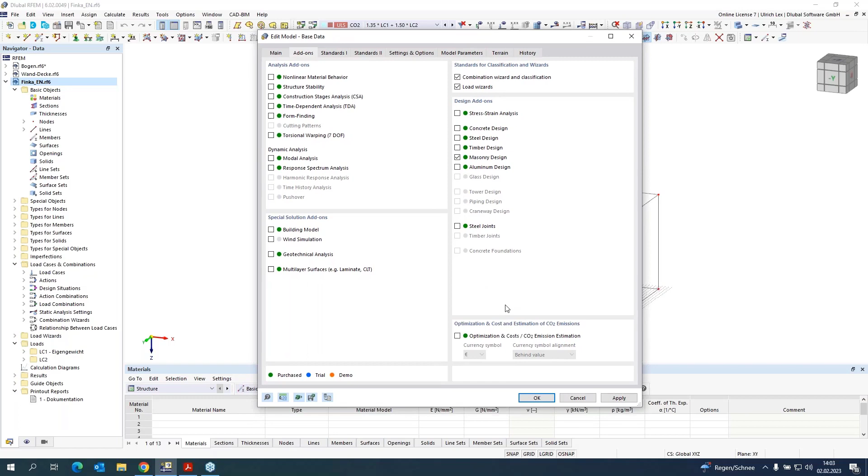I have prepared a structure with lines and nodes so that it is easier to continue. You can import such a structure also via DXF, or if it's possible with Revit, if you get this file. So at the beginning, when you work with the masonry add-on, please check in the base data if the module is checked on. This is necessary so that the material model is available in the program. If it is checked on, you can continue with OK.

So for the first step, I want to create some new materials. I can do it here with new material. At first, I can choose the material type masonry, and here the material model that I want. Basically, we have two different material models for masonry. The isotropic one, some of you know it maybe from RFEM 5, and the orthotropic masonry, where you consider the stiffness in both directions and the shear stiffness of masonry exactly. So this orthotropic one is the best one.

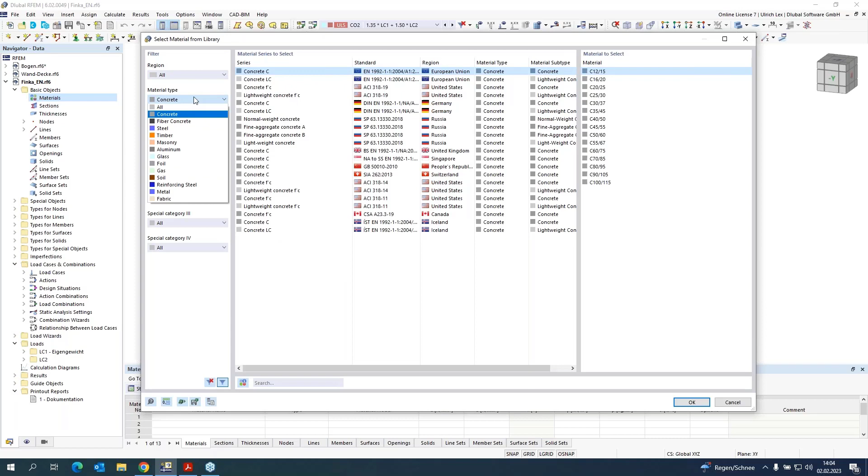Now you can choose a material from the library. I want to create a new material for the outer wall, maybe in Porotherm. In the database there are still only products from Austria, but we are continuing to implement new materials as far as we can. If you read in the materials, you can see in the standard classification the table is filled out. You can do this also with data sheets from a manufacturer. You get all values, I think, from the manufacturer.

One value maybe not. It's the horizontal compressive strength. Maybe you can ask the manufacturer, or you can use some default values. This value is depending on the group, and here you can say for the group 1 you can use 60% of the compressive strength, for the group 1S 80%, for the group 2 10%, for the group 3 5%, and for the masonry group 4 100% of the compressive strength fb. Set the default values if you have nothing better from the manufacturer.

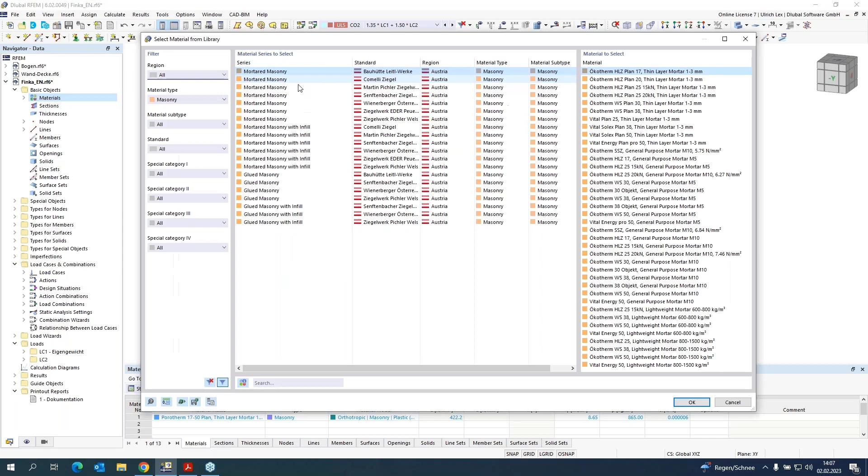Okay, then I will continue and create the next material for the inner wall. It's the same as before. Okay, I have to do it again to create a new one. And the third one, I want to create a patio and use a full stone maybe. And as the last material, I want to create a concrete for the slabs. Very important, you always have to set the orthotropic material model.

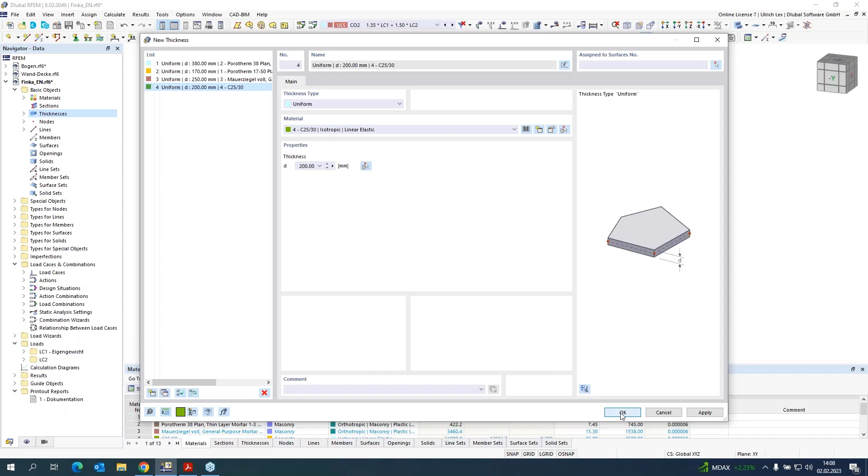Okay, the next step I want to do is to create the thickness. The first thickness will be the outer wall with 380 millimeters. The second one with 170 millimeters. The third one 250 millimeters. And as the last, the concrete one with 200 millimeters. So now I have defined the material and its thickness.

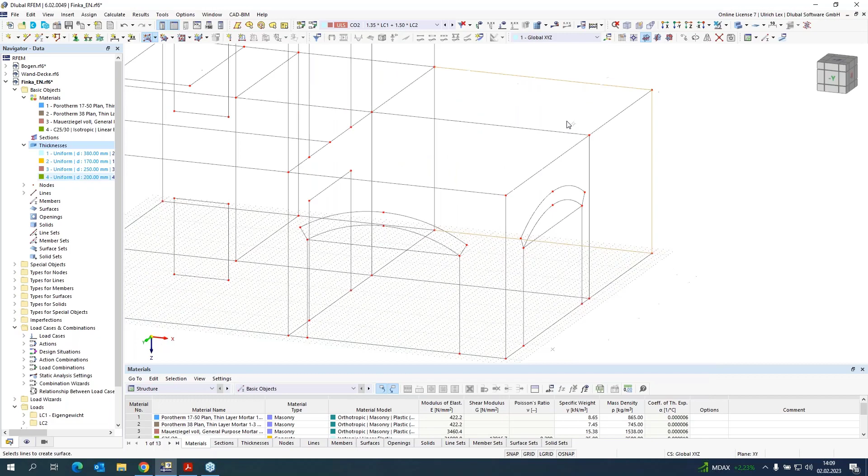Then I can start to create the surfaces. As I already have the nodes and lines, I can do it with select boundary. I can choose my thickness for the outer wall and choose my lines to create the wall. I will do it for all walls.

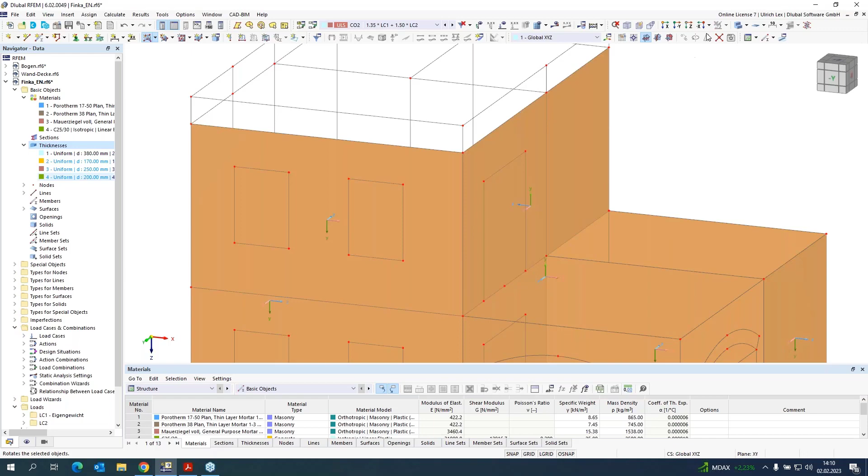This one. And upstairs I have also 4 walls. And the last one.

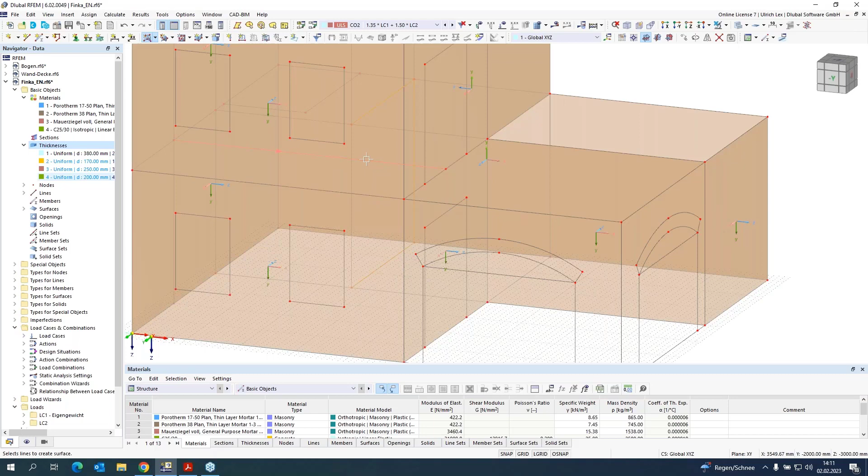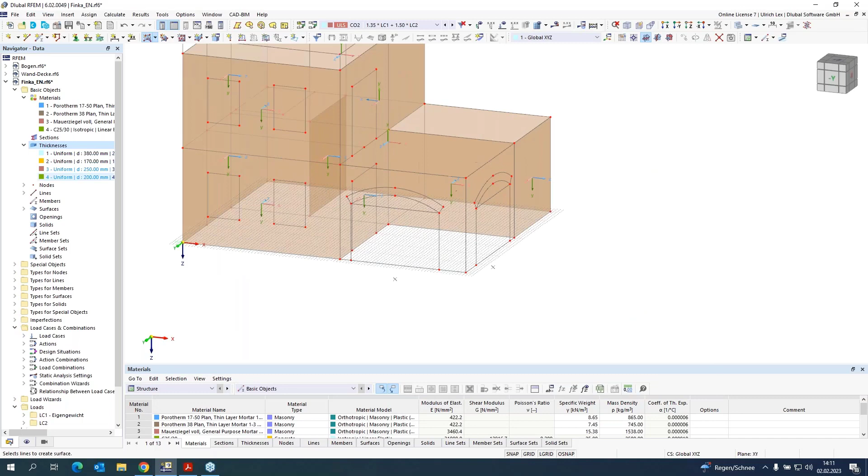Okay, as next step, I want to create the inner wall. Choose my thickness. The material is automatically attached to the thickness. I only have one wall inside the building. As the third one, I want then add, okay. I have here to choose this line.

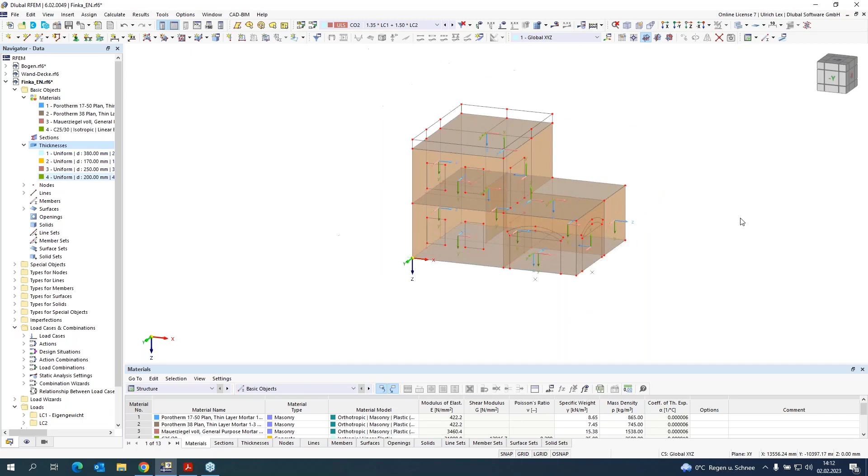And as the last step, I want to create the concrete slabs. One for the roof slab. And the base plate. So, okay, that was the final thing.

On the roof, or for the roof slab, we have the first thing we have to consider if we work with masonry walls. If you have a masonry wall and a roof slab, then always the slab wants to turn up in the edges. That would cause damage here in the masonry. That's why we have to create something so that the slab cannot turn up.

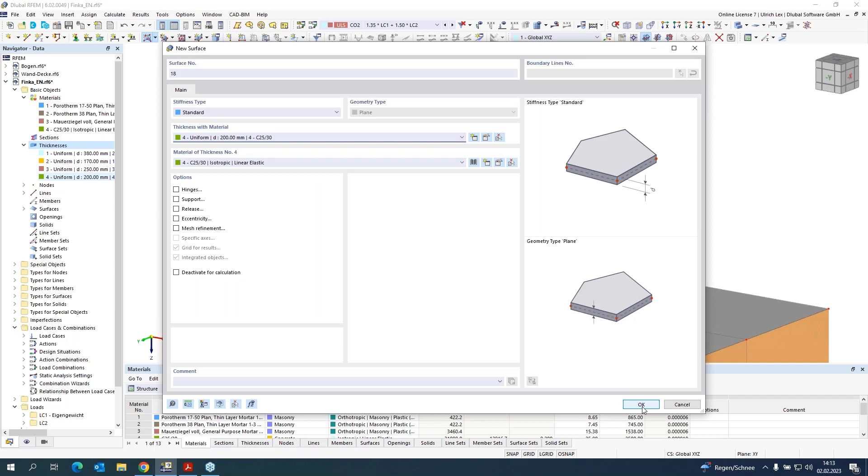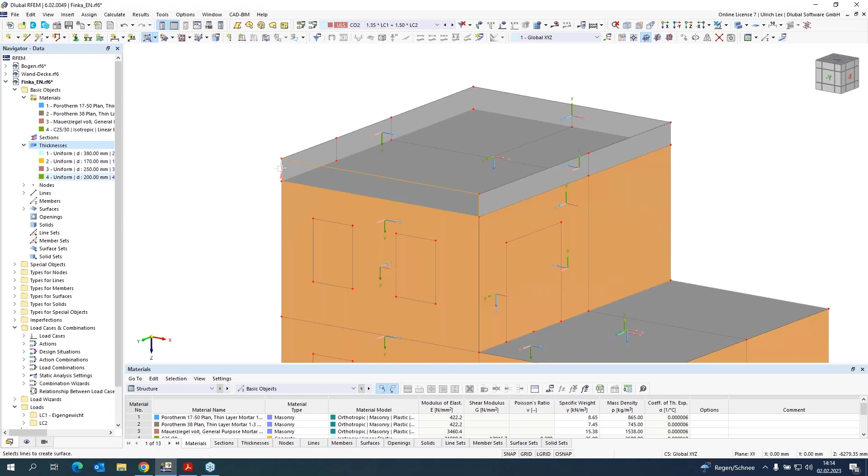In this case, I want to create an attica in concrete, so that this turn up cannot happen. That's why I create here some additional surfaces in concrete. That's the attica. Oh, that's the wrong line. Okay.

Here on the patio, we do not want such an attica. That's why we have to think about another possibility to avoid this turn up. Here I decided to create a new member that connects the slab in the first floor with the base plate, and to, I would say, hold the slab so that it cannot be turned up.

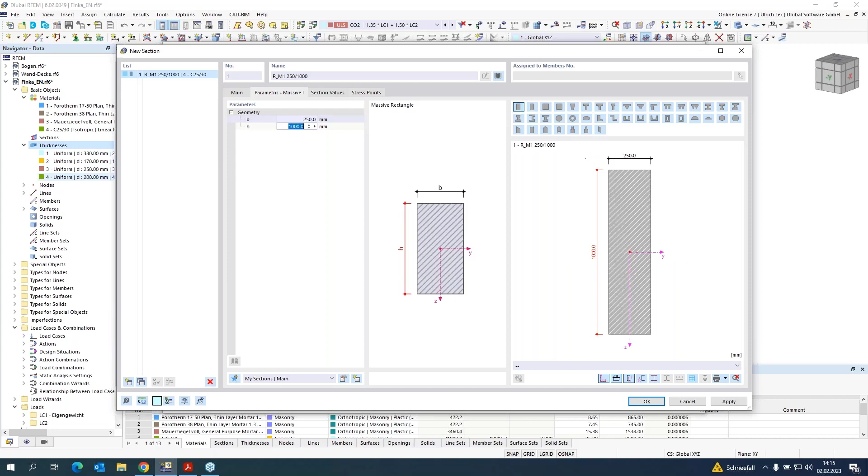So here I can select it, double click and assign a new member, like a member type beam, create a new section, material concrete, dimensions maybe 250 by 1000 millimeters. Okay. Now we have modeled the whole structure of the building.

What do we have to think about now? An important thing is also the local axis of the surfaces. Masonry does have a different stiffness in Y and X direction. That means the Y direction should always be in the direction where it is loaded, and the X direction is the other direction. The Z direction is important in our program to evaluate the results.

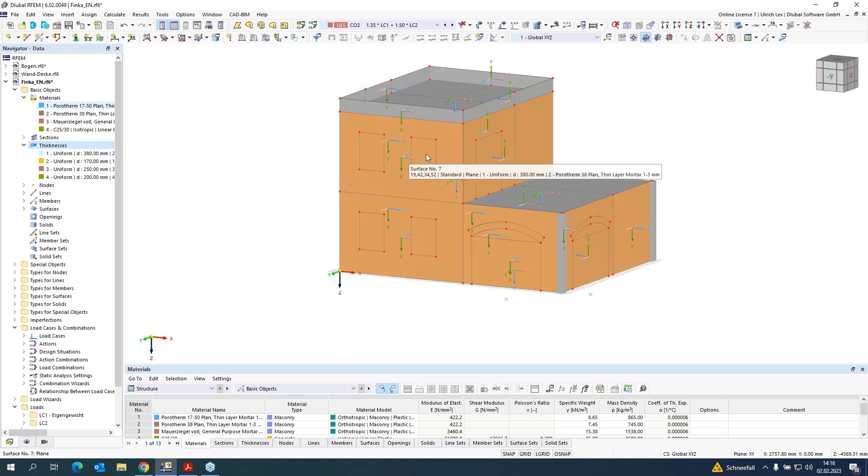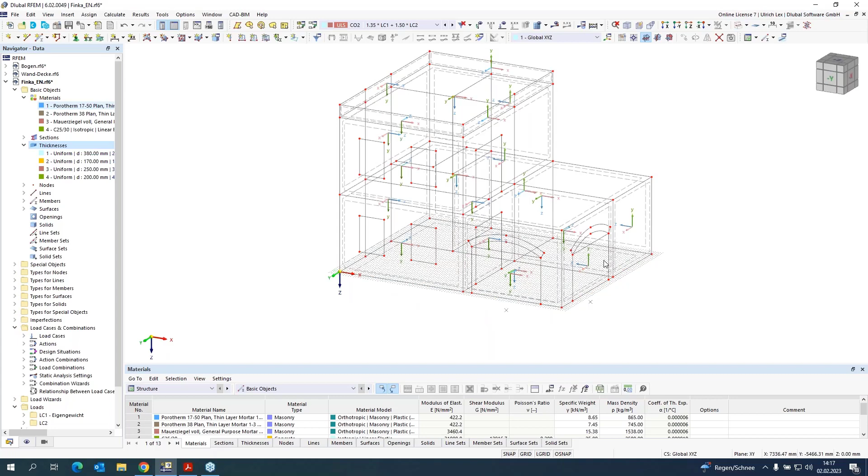And I'm used to orientate the local Z-axis in the same direction. I always try that all local Z-axes point inside the building. That's why I changed it for this surface. Here it's okay, here it's okay. So, and maybe this is inside, this we have to change. Okay, so far so good.

The next step we can do is create the openings. The lines are still there. That's why we can use them. We can define it graphically. Here, here, and here. And here is the door. Inside is a door. Here we want to create such an arch.

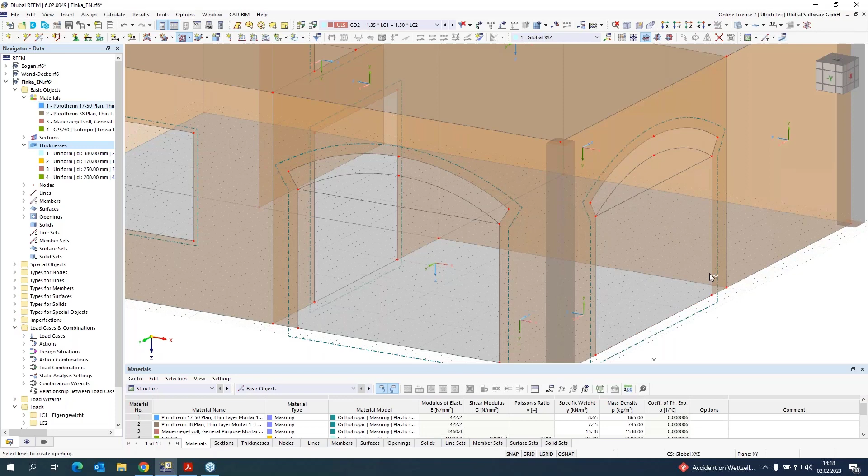Okay. If we create openings in a masonry surface, we have to think about the lintel, because the masonry does not have a stiffness for tension. So it could be that this area falls out of the wall. In practice, there will be some masonry lintel or something else. But this is the reason why we have to create it in the program too.

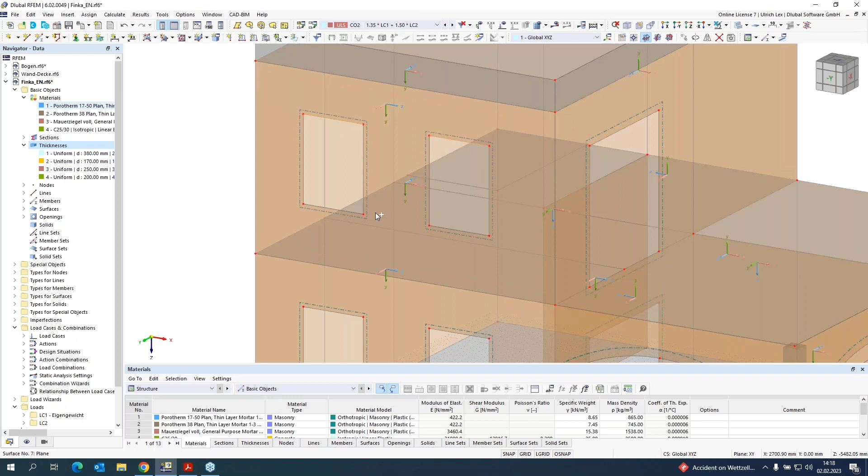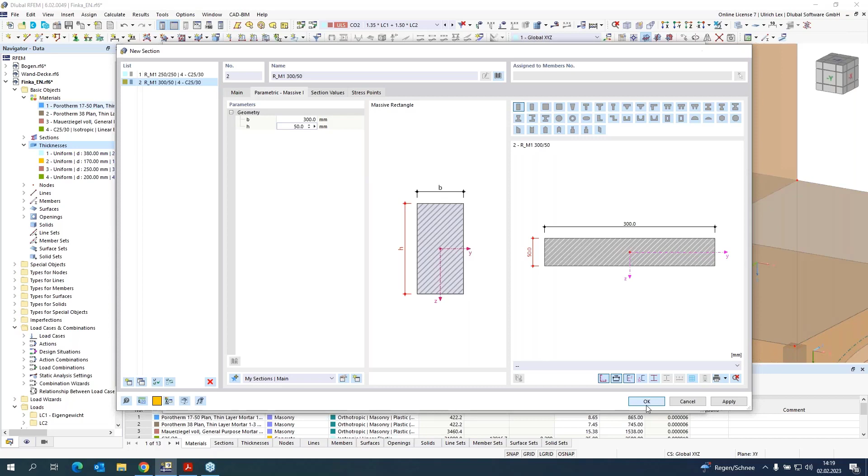Therefore, I want to create a new member, or assign a new member, create a new section, concrete, maybe with a width of 300 and maybe 50 millimeters high. Okay.

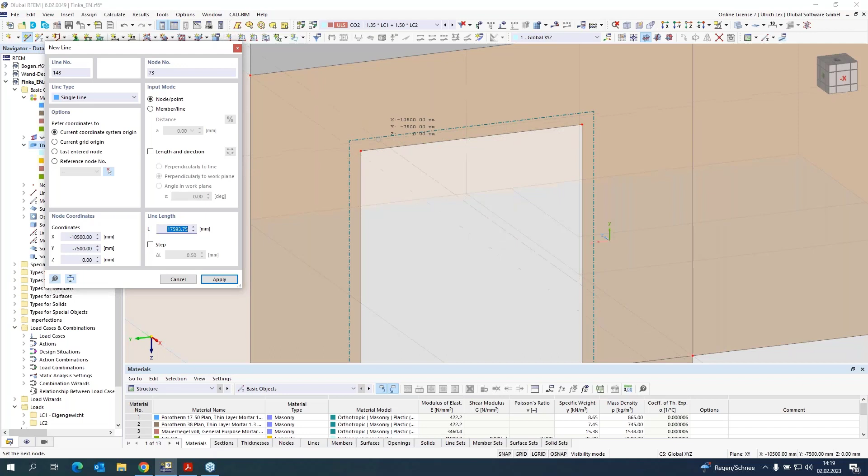If there are bigger openings, then it is the same. You have to create a lintel too, but we have to extend the line a little bit into the masonry wall. That's why I extend this line 10 centimeters or 100 millimeters into the masonry wall. The reason for this is that I can smooth the loads, so that not one FE node gets the whole load from this lintel.

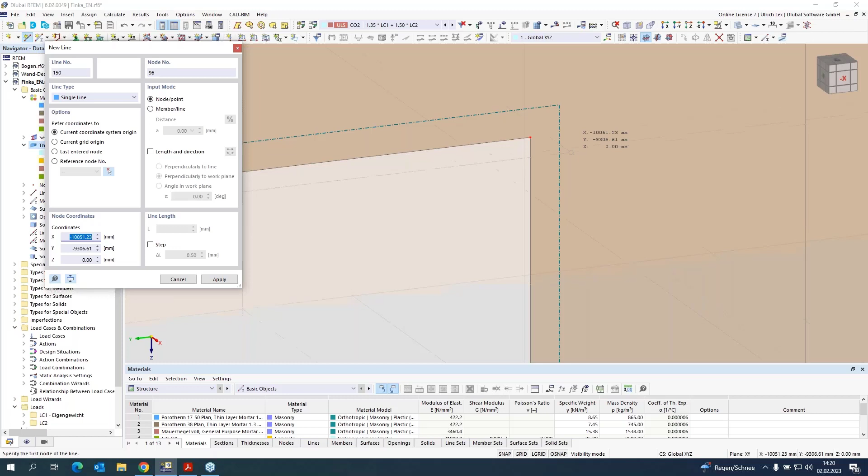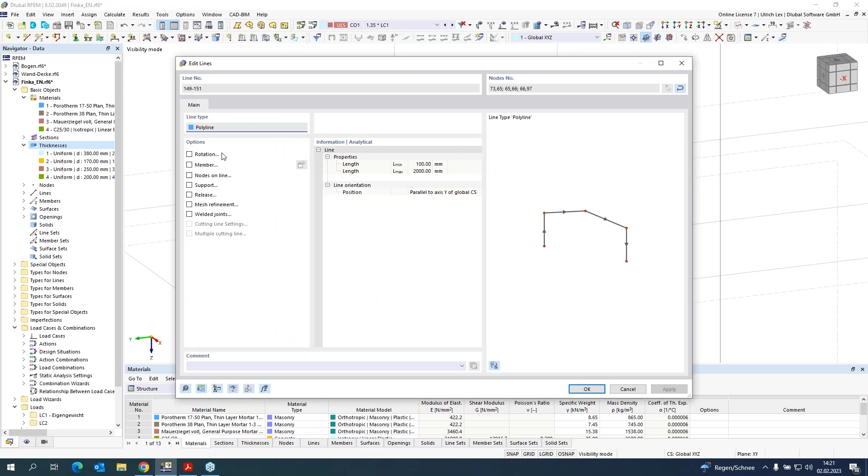To copy it. And I want to copy it also for the second opening. And here I can assign this member too.

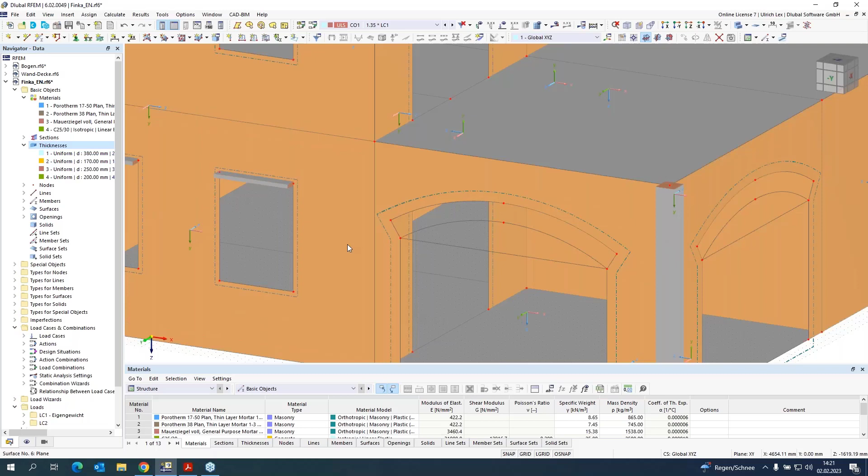So as a next step, I want to take a look at this arch. Here I do not want to assign any concrete lintel. I will assign a new surface with material, with masonry material. And the second one too.

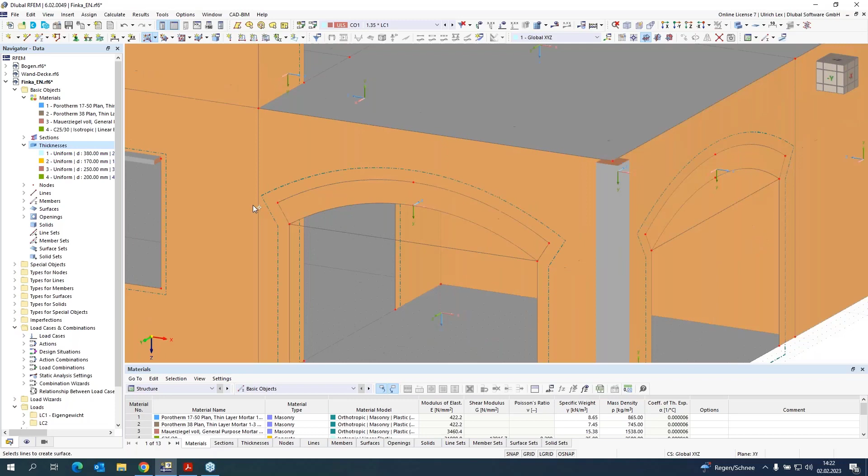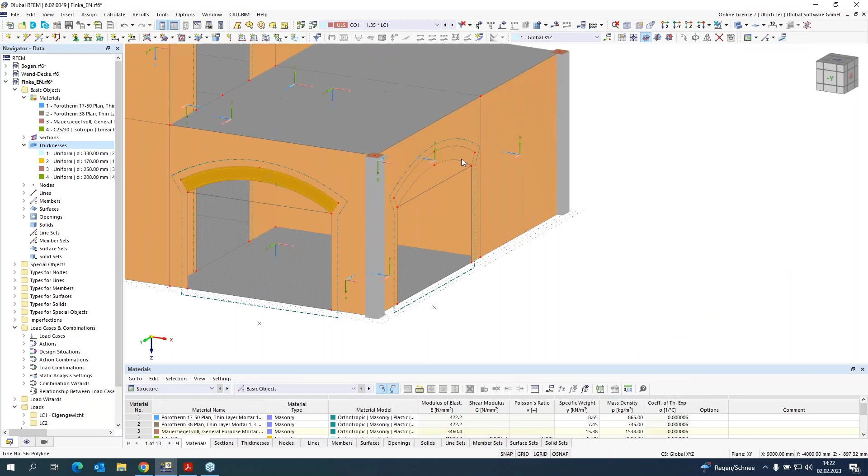And now, is it necessary that the local y-axis is changed? Because my load transferring is parallel to this line, and therefore we have to change this local y-axis. I can do this in the surface dialog with specific axis, input axis parallel to a line, choose the y direction, and choose the line. It's the same for the second. Okay. So far, so good.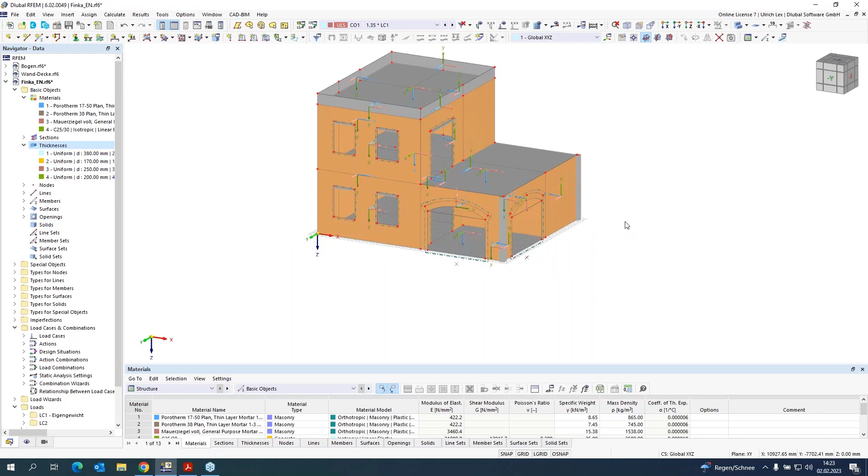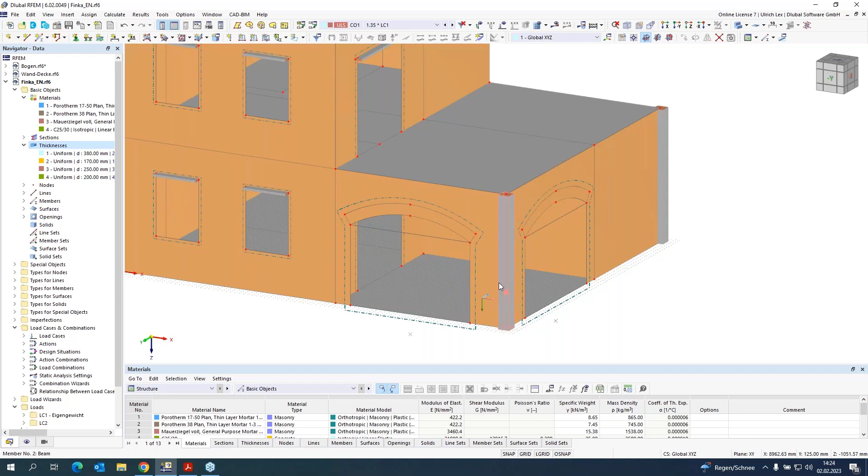The next step I want to take a look at is the connection between the masonry material and the concrete material. In practice, I do not know if it's 100% connected. I would say maybe there's a little bit of friction in the connection, but on the safe side, I would assign a hinge where I disconnect both materials. That's why I create a new hinge in X direction, so that I have no shear connection between the masonry surface and the concrete surface.

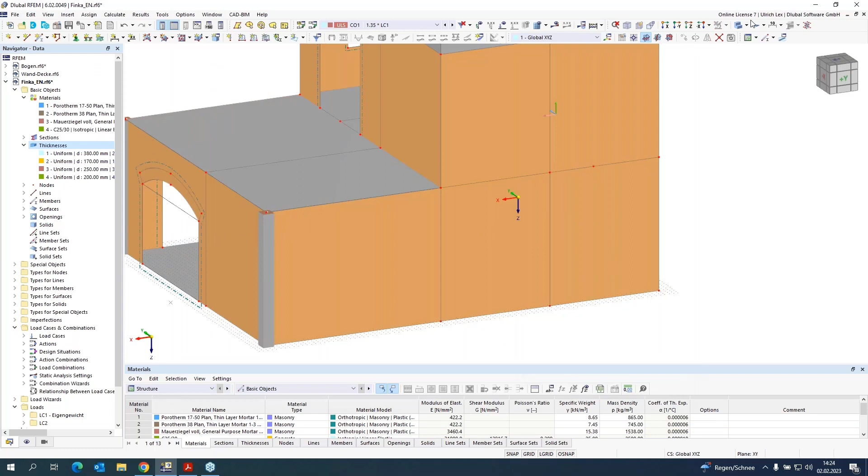I will assign this to this surface, to the second surface, and also on the member behind. Okay, here I can check where the hinge is located. The same thing.

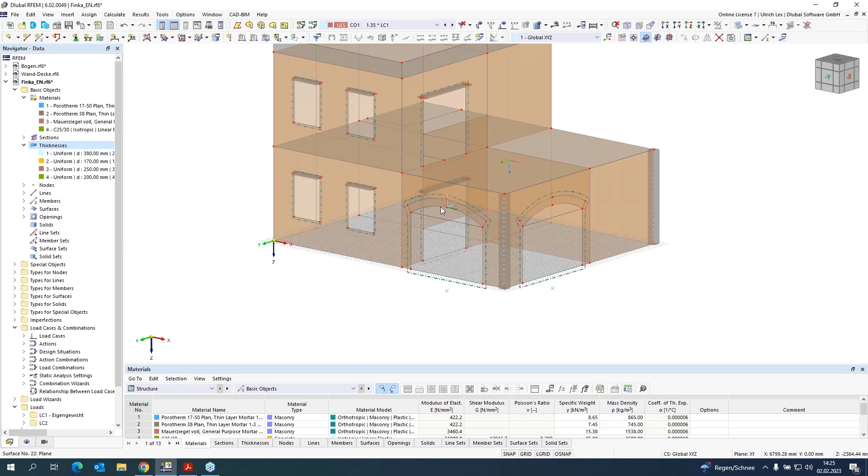What I have to think about is the inner walls. In practice, I think the outer wall is built up, and at a later time, the inner wall is built. Maybe there are some masonry connectors assigned, but I do not think that there's a full shear connection between the inner and the outer wall. That's the reason why I also assign a hinge in the local X direction.

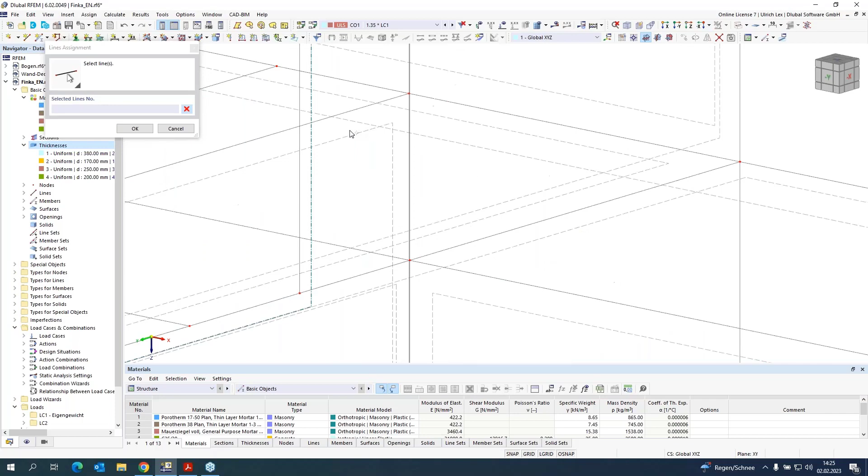Okay. As a last step, we have to think about the connection between the concrete slabs and the masonry wall. Here it's a special thing for the masonry, because the concrete slabs are not lying with the whole width on the masonry structure. And that's why we have to assign here a special hinge. It's called wall slab connection. I have to assign this on the slab. That's why I define it on the slab.

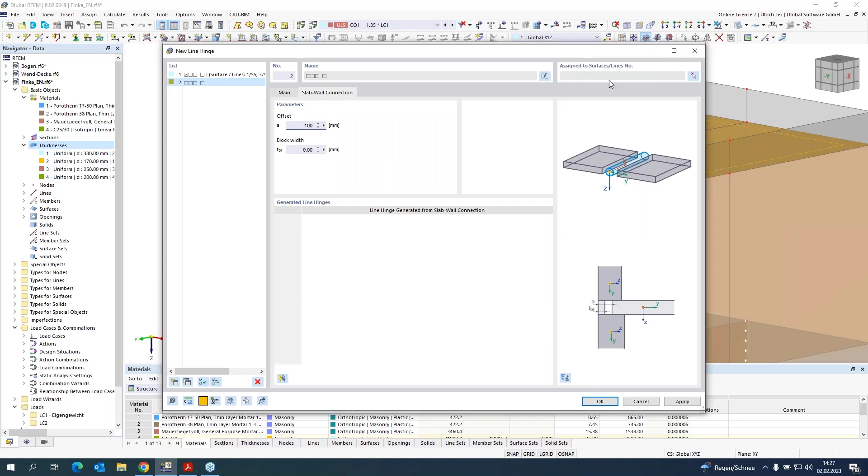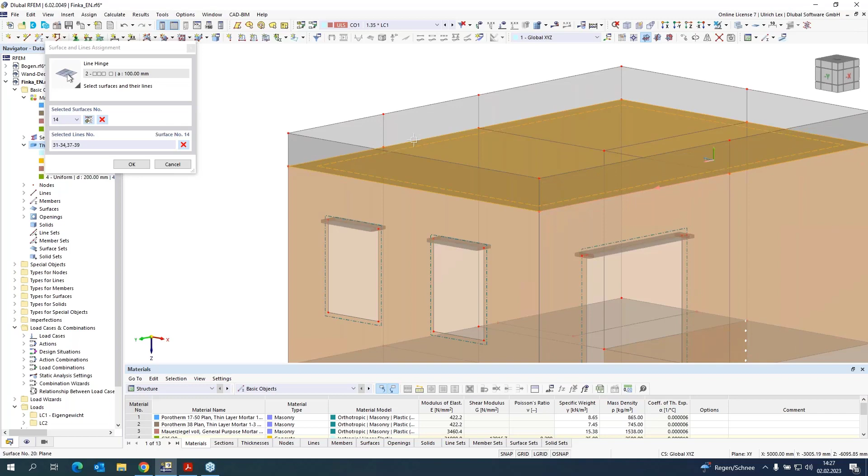I assign a new hinge, create a new one, and here I have the option to choose the slab wall connection. It's only a placeholder where I define the geometry of this connection. You can use the tab slab wall connection. I define here 100 millimeters and can assign it to the lines and surfaces. I have to assign it here on the slab roof, here on these lines.

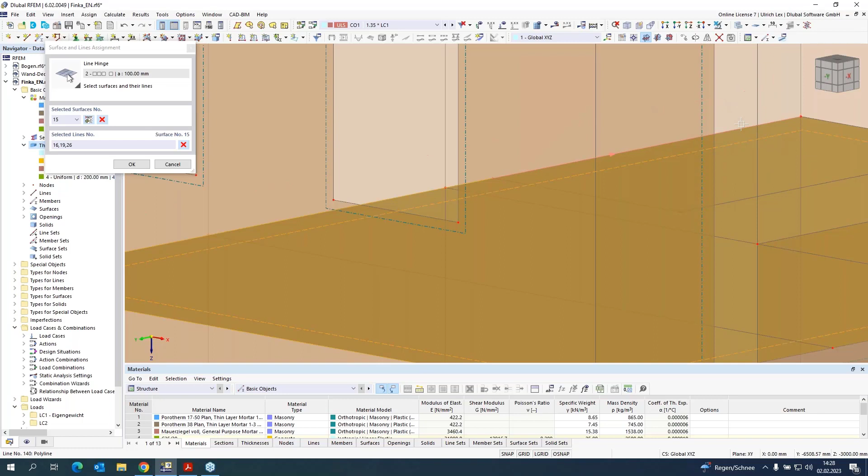Here I have an opening, maybe for the stairway. Here I do not have to assign this wall slab connection. Why not? Because both walls are standing directly above and there is no slab connected. It could be possible that we have to assign it also for the base plate, maybe when some insulation is placed under the base plate. But I will not do it for this example.

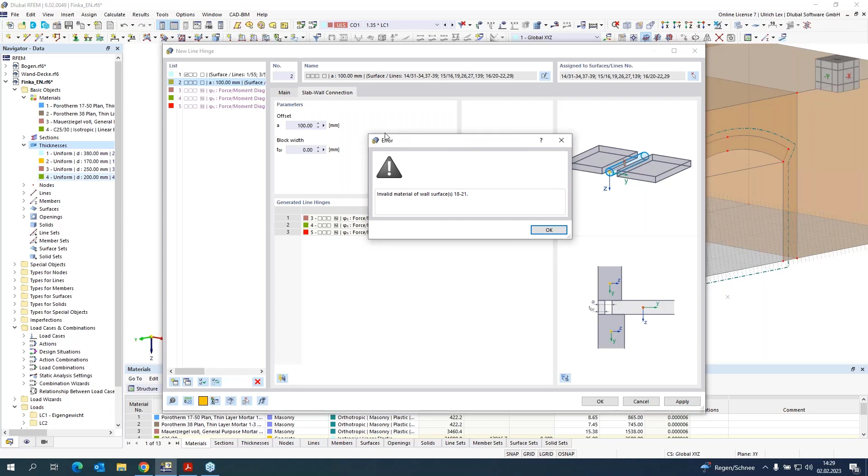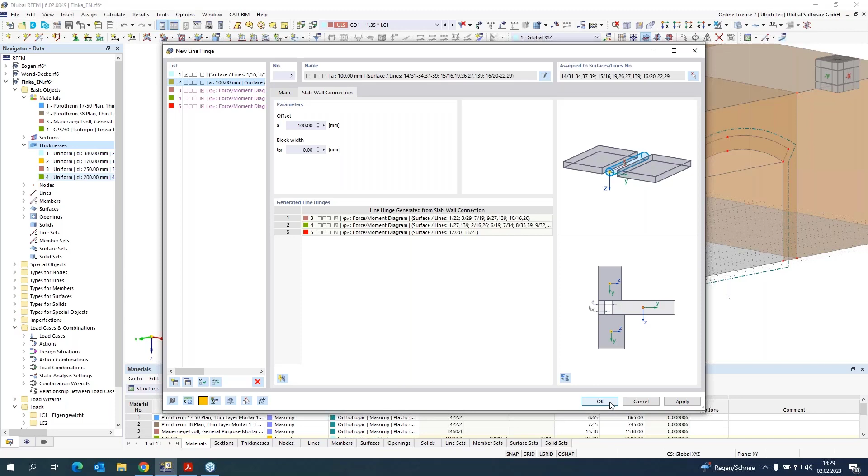So if you have assigned it to the surfaces and lines, really important, we have to generate the line hinges for the connected walls. You can do it with this button. We get one error; this is okay because our attic is a concrete material and no hinge will be generated. Now you can see the generated line hinges. The amount of hinges is not important because it's connected to the orientation of the surfaces and their lines. The program does this automatically. If you continue with OK, you can see the generated line hinges.

What happens here on this detail? I have prepared an extra file where I can explain it. What happens at the wall slab connection? The slab does not lie over the whole width of the masonry wall. Now, on the wall there is some normal force. The normal force does not have the whole width, so it is concentrated on a smaller area. Because of the deformation and the bending moment on the slab, this area will be concentrated to a really small area in the wall above. In the wall under the slab, it's nearly the same.

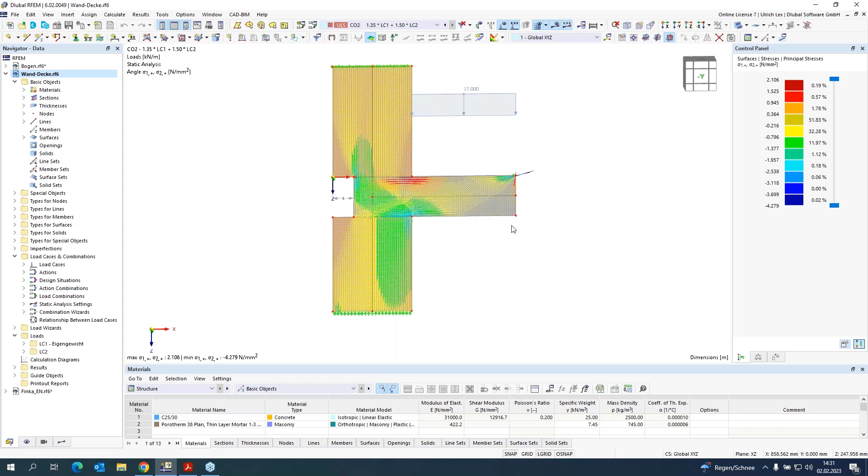Here I have at this place a concentrated area where I have this normal force. So this bending moment depends on the normal force from the wall. And our slab wall hinge does only this: we have a limit on the normal force and a limit on the bending moment. I can show this on the original file.

If I open such a generated hinge, we can see that if we have no normal force, we cannot have a bending moment. If we have a normal force, we can have a bending moment too. If the normal force is so high that the compressive strength is overloaded, then we can only have a smaller moment again. And if we have too much normal force, then the detail point is overloaded and we have no stiffness. That's why it is so important that we assign this hinge in case of a concrete slab.

Okay. If we have assigned all these things, then we are done with the modeling. I can continue with the loading. In our case, I only want to assign a self-weight of 2 kilonewtons per square meter.

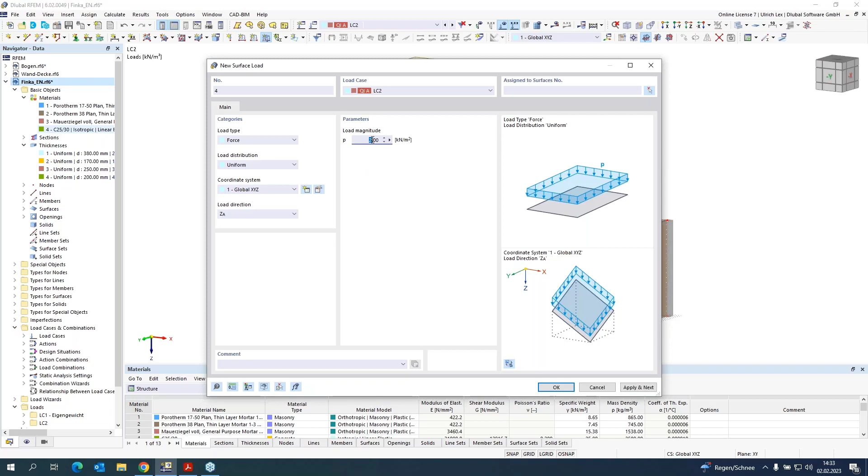And for imposed load, also 2 kilonewtons. And maybe 4 kilonewtons on this patio. Okay. So this loading is only an example.

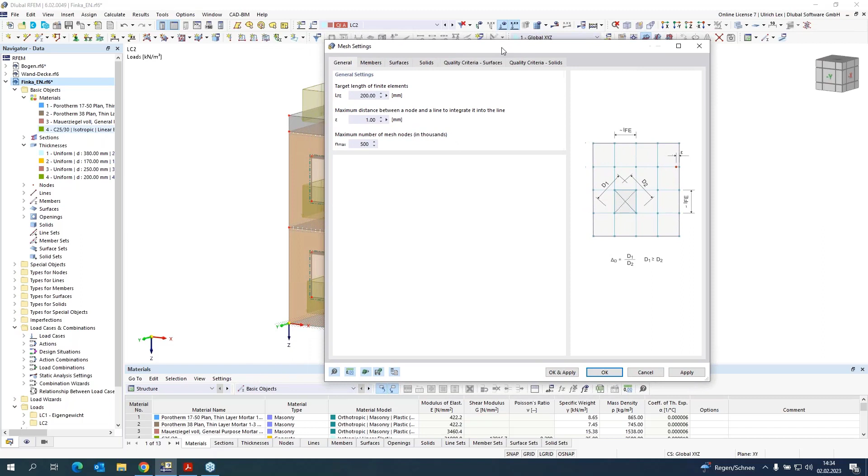So what have we checked before the calculation? We have to check the mesh. It's very important because of the nonlinear materials that we have, and that we have a good mesh. We can recommend that the mesh size should be between 200 and 250 millimeters. Of course, it can be that it has to be a little bit smaller or bigger, but it should be about this size. So it is necessary that you as engineer check it, and you can say as engineer that it is, I would say, a nice mesh.

Because when you have too many small elements or too many triangles, then it could be that the calculation time is very high, that the calculation does not come to an end because of this inconsistent mesh. So it's necessary in some areas maybe that you then assign some mesh refinements or something else.

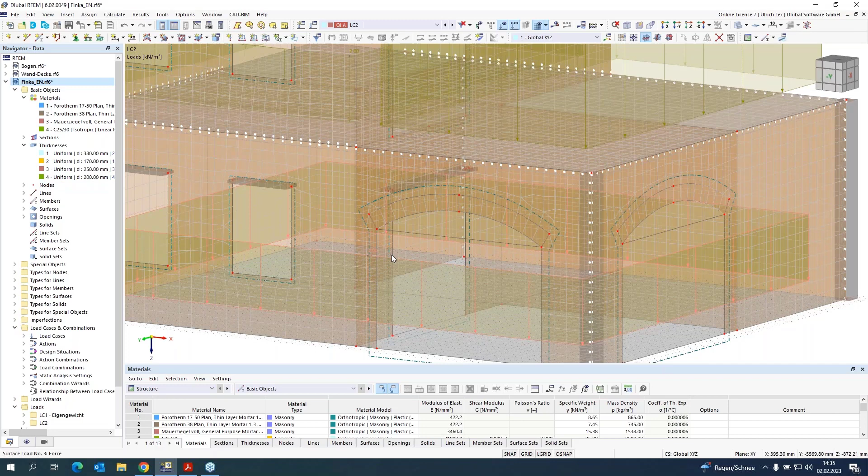So the next thing we have to check is the calculation type. For the calculation type, we have 3 options: the first one is geometrically linear, the second order, and the large deformation. I would recommend maybe the geometrically linear or the large deformation. The second order is by default the Picard solver. This solver is not so good for the masonry material model.

For normal buildings, I would recommend the geometrically linear. It's also possible for the nonlinear material model. And for structures where you have really thin walls, thin and high walls, I would recommend the large deformation analysis, because then you have the moments from the deformations in the system too.

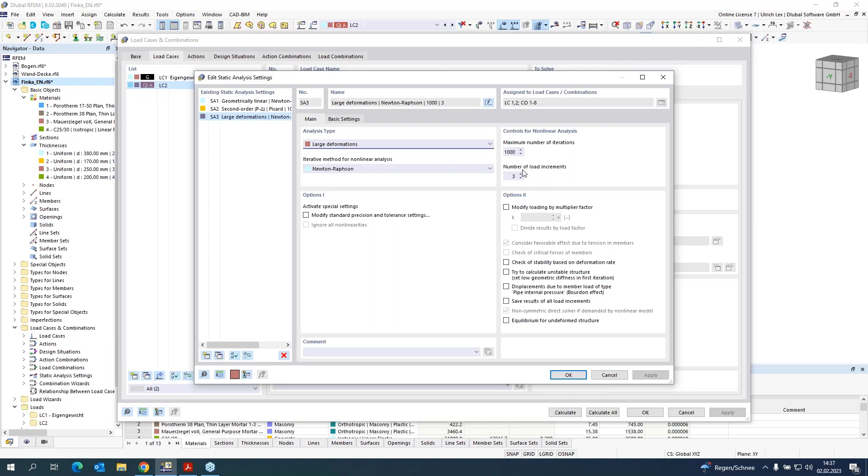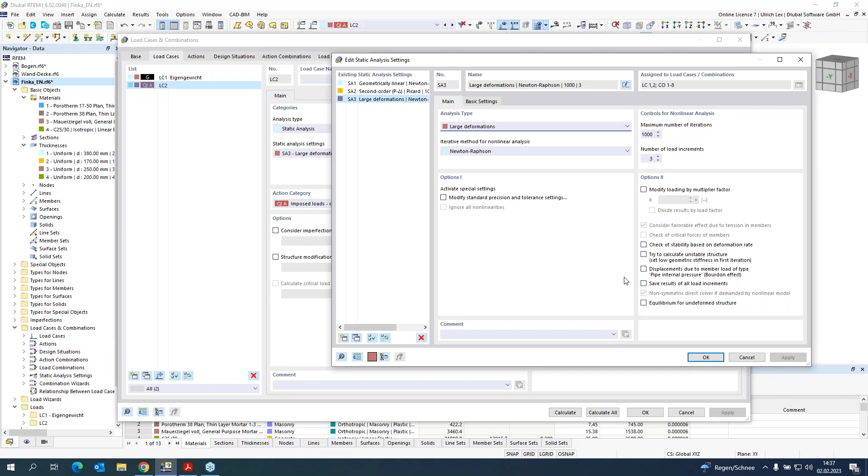For the nonlinear calculation, it is always good to increase the number of load increments. I would recommend here a value of 3 to 5. It's because then the FE element will not be loaded in the first step with the complete load. If you want to see the results of each load increment, you can check it here, but it will increase the file size. So you have to think about it. So that was all we have to consider, and now we can start the calculation.

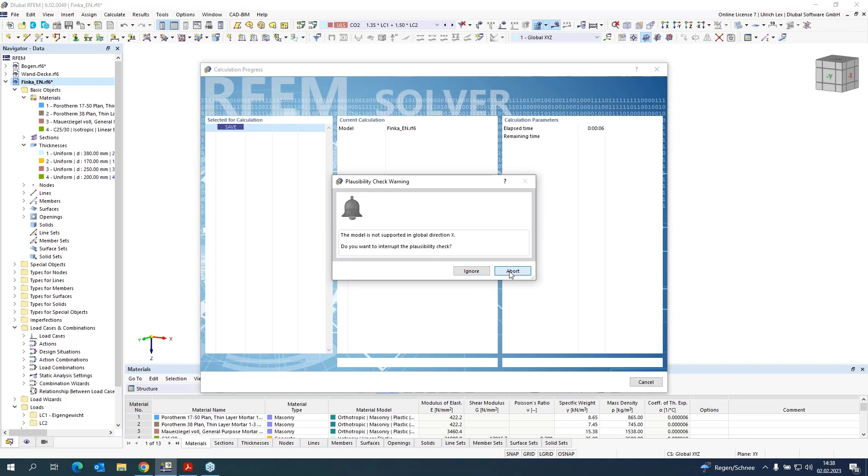Oh, I forgot the support of the system. I want to support the base plate. That's why I assign here some spring constant, and now we can compute it.

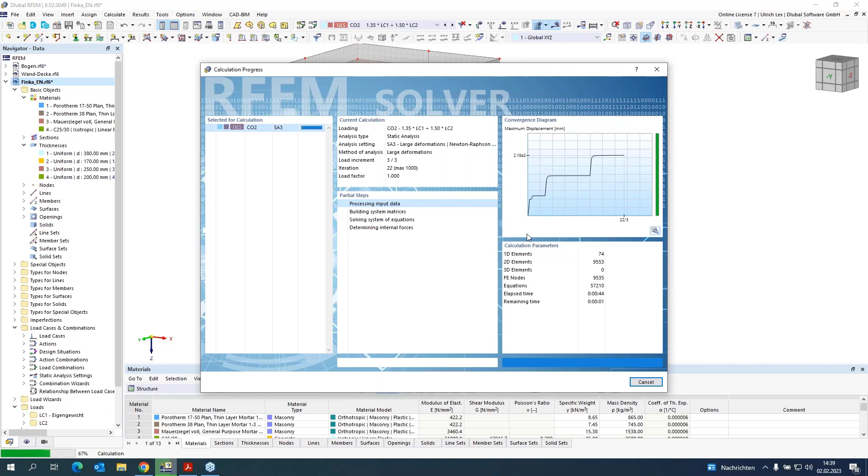So here you can see the iteration process. You can see the load increments that are computed. You get information about the FE elements. If you want to see this curve afterwards, you can check it in the convergence diagram. Oh, and now the calculation is finished.

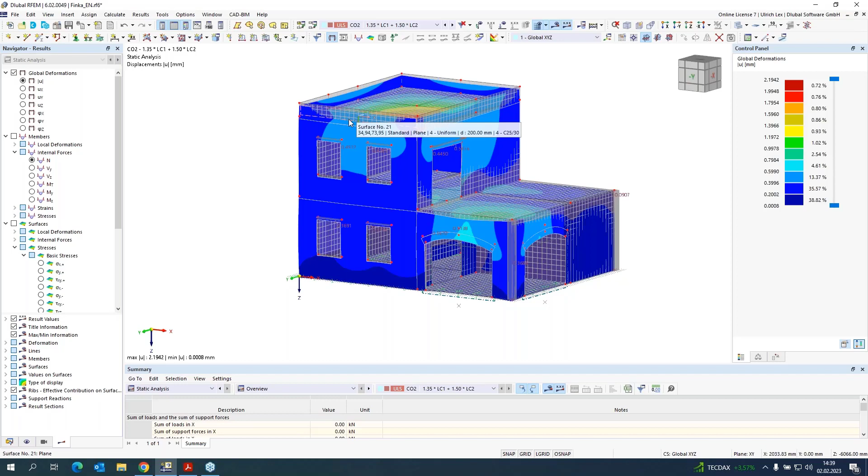When the calculation runs without problems, then all criteria for the masonry material are okay. For the masonry material, there is no check of the ratio. It is not possible because of the nonlinear behavior. Here now we can check the results. Maybe we can check the stresses, the stress in sigma y direction.

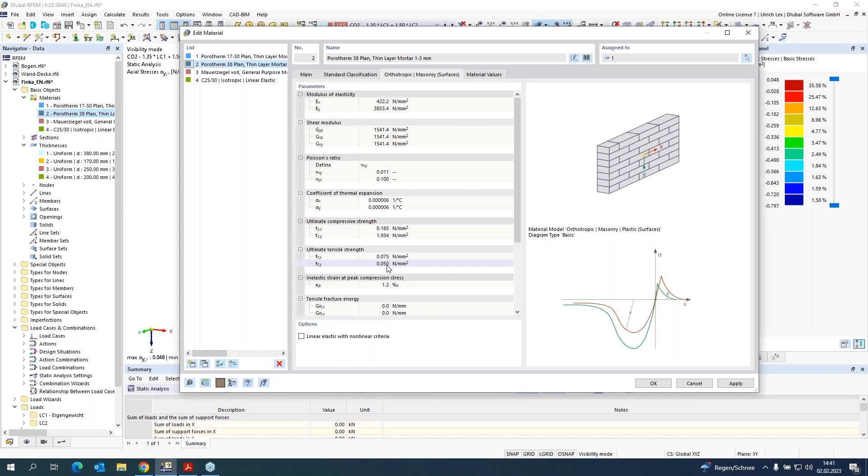And if I take a look at the masonry walls, then I can see that I have a maximum sigma y in tension of 0.048, and it's the same as we have here for the orthotropic details. We have an ultimate tensile strength of 0.05. Here we can see that the computing of the material model is correct. That does not mean that we are overloaded or something else. We only see that some elements have tensile stress, but not more than is possible for the material model.

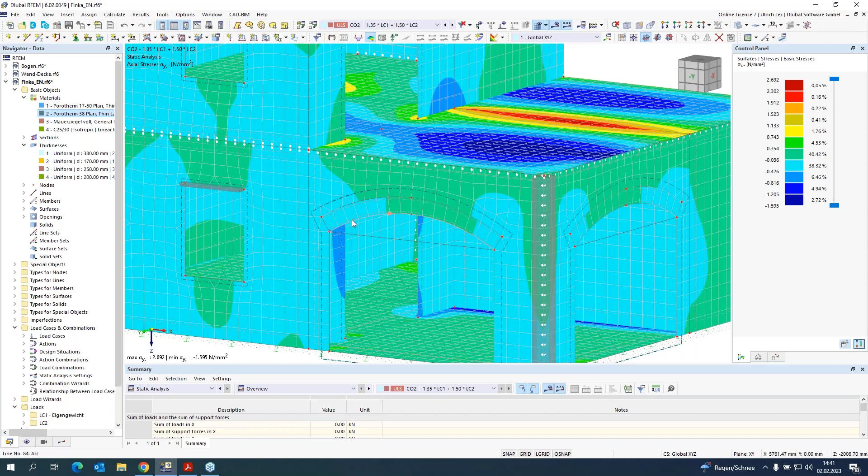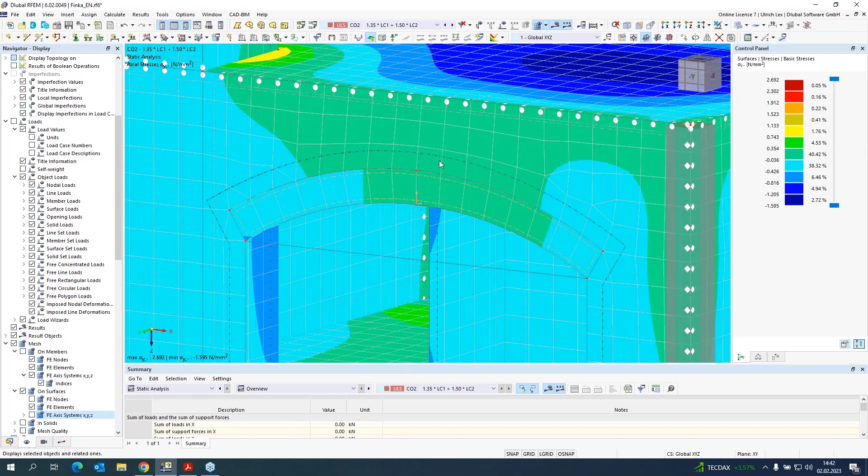So okay. So the next detail I want to show you is this arch. The FE elements of this arch are now oriented in the direction of this line. Oh, sorry. You can see the local Y direction is in the direction of the line, and that's why we can create this arch.

I tried to compute this arch also by hand, I would say. I created therefore a separate model. When I take a look at a formula for such an arch, I get a maximum horizontal load for this arch of about 200 kilonewtons, with a loading of 77.5 kilonewtons.

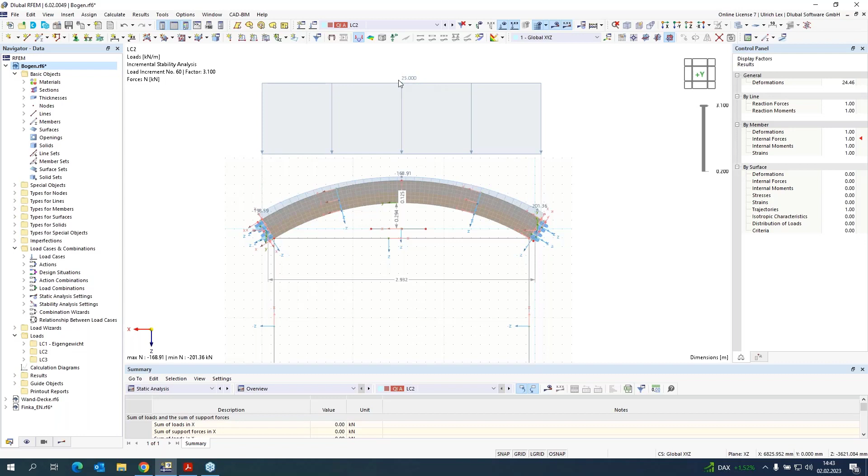If I compute this in our program, I did a stability analysis where I compute the maximum load of this arch and get an increasing factor of 3.1. Then I have this 77.5 kilonewtons loading. And the normal force in this arch is about this 200 kilonewtons. That shows me that the analytical formula gives the same results as our material model for masonry.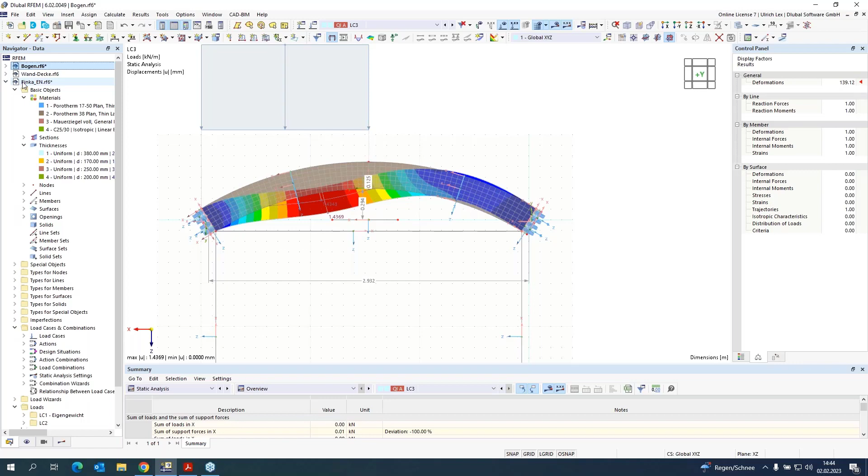Okay, now documentation and results. For the documentation, we can create a new printout report. If you create a new one, you can select a lot of tables, result tables, everything you want to document, the important things you need. More important in my eyes is to document some pictures. This can be done also easily.

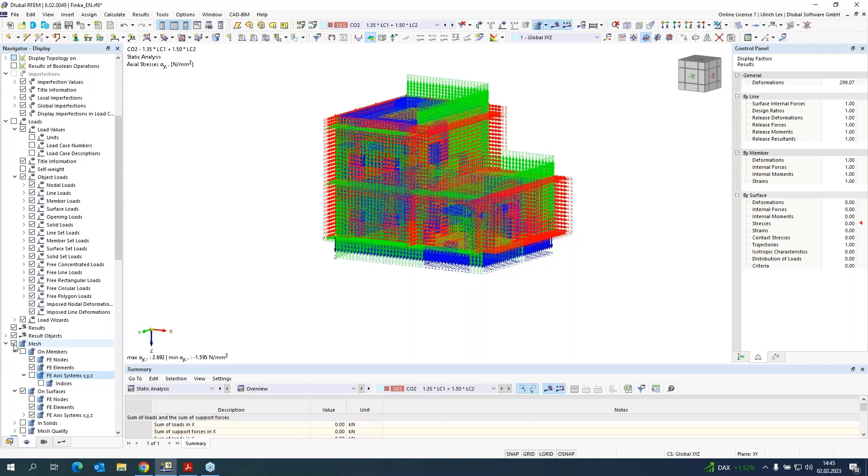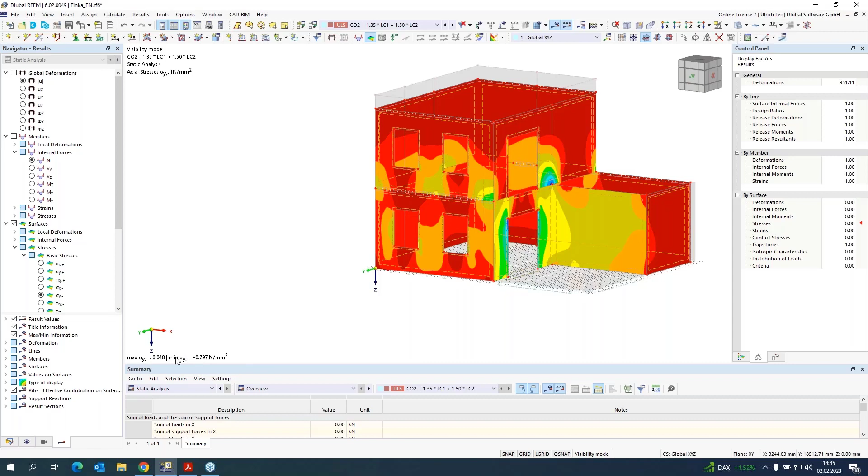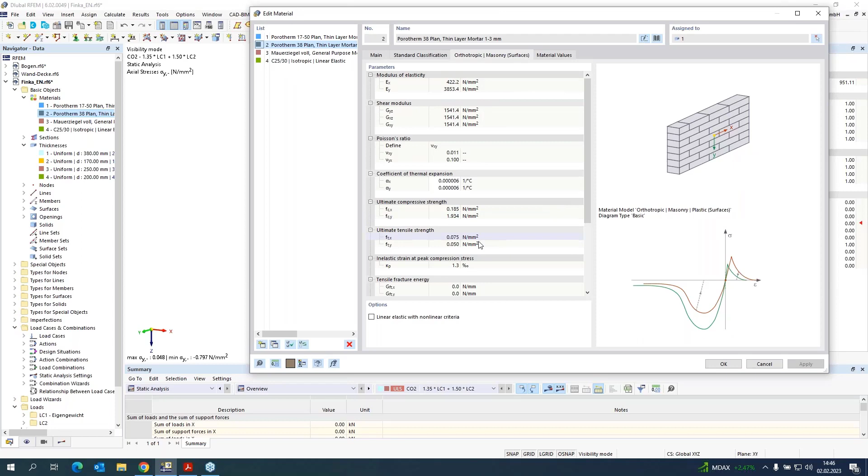Maybe you choose the outer walls. Then you can see, as we have it, the maximum Y stresses here. You can see that the maximum compressive Y stresses on the minus side, this is the outside of the building, are at 0.79. And if I take a look at the material, the maximum compressive strength is 1.9. So the design ratio is not 100% with this case.

Okay, I can print this to the printout report via this printer button, print graphics to printout report. Here you can set maybe also a scale where you want it to print, or on the full page, and with save and show it is printed to the report. Exactly.

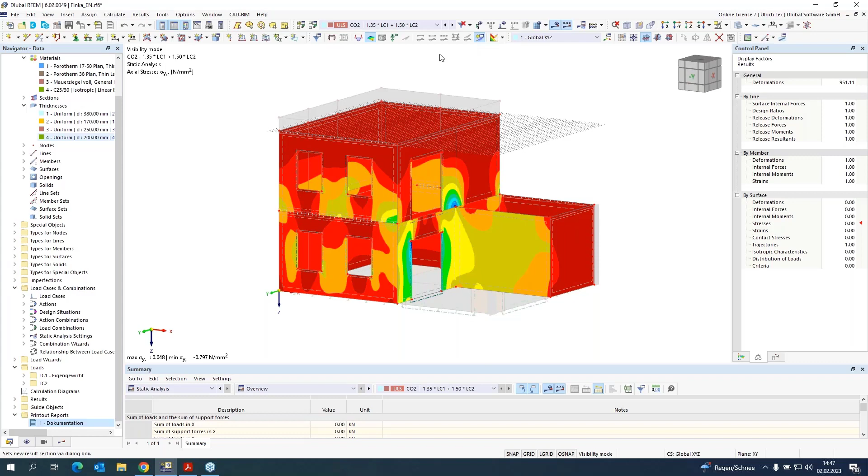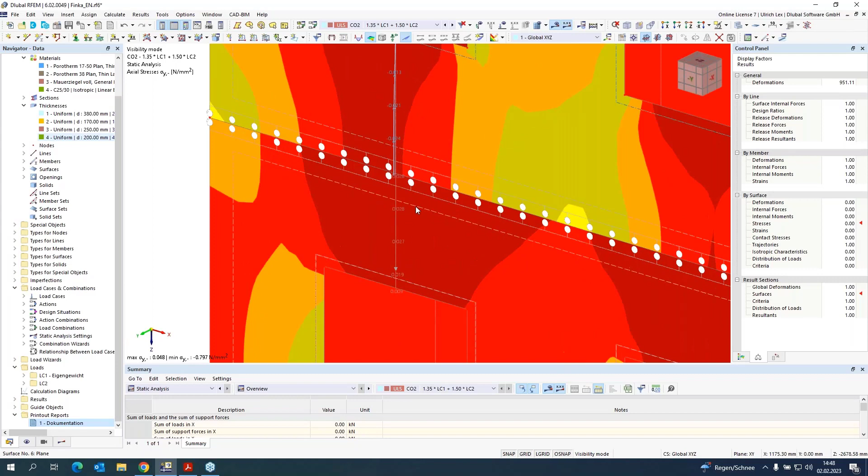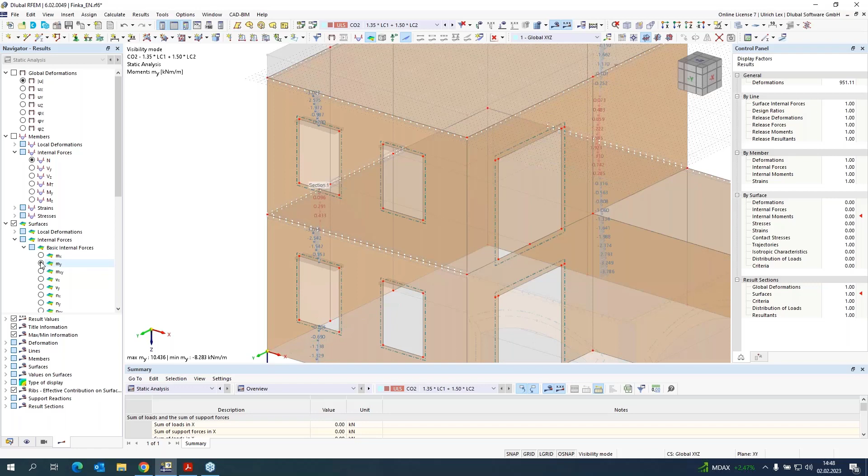So the next possibility I want to show you are the sections. You can create a new section. Maybe here. Okay, then you get results on this line, I would say. You can check the moments that are on the node, and all other results. Maybe the my, then I get the moment that exists on this slab-wall connection.

Also, a possibility is to check these results with a result beam. Here I can assign a new beam, a new member, and choose a result beam. Then I can say, okay, I want to see my results, or sum up my results, in an area of 1 meter, and want to see it only on this surface.

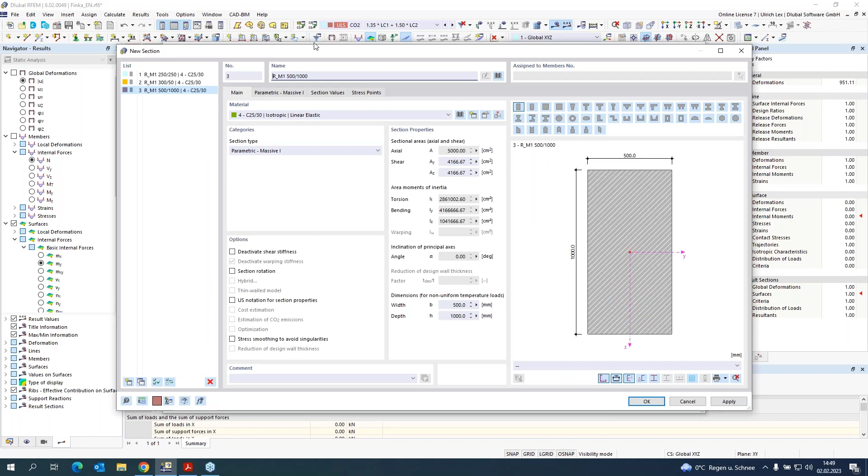Here I have to create like a dummy section. But I do not want to design this section, I only want to see the results. And now I can see these results as member results. Maybe also the moment. I can do the same for the line above. Result beam.

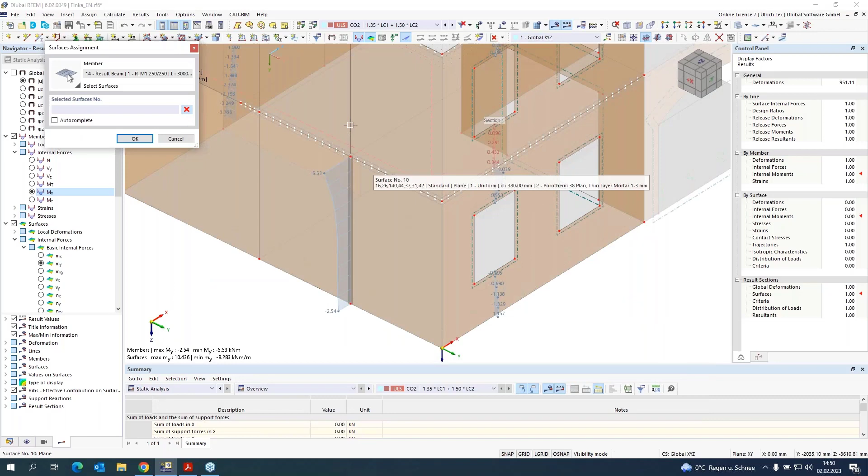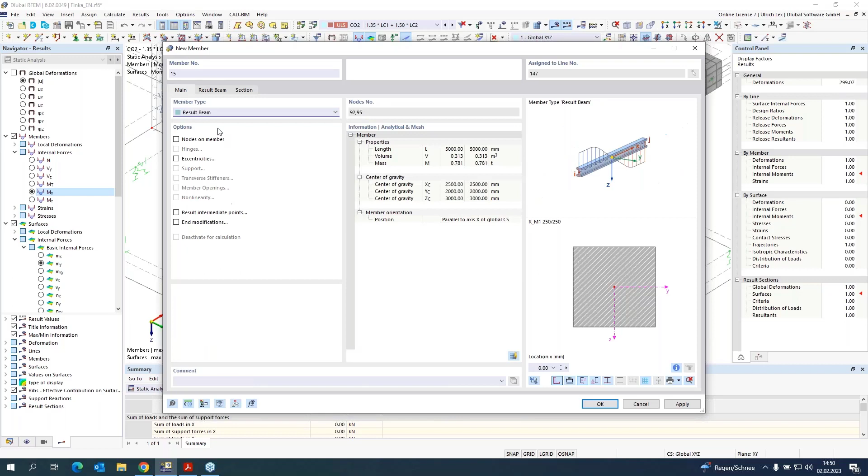Okay, and maybe also for the slab. Then I can see the results per meter on these different surfaces. This is a good way to check some special results.